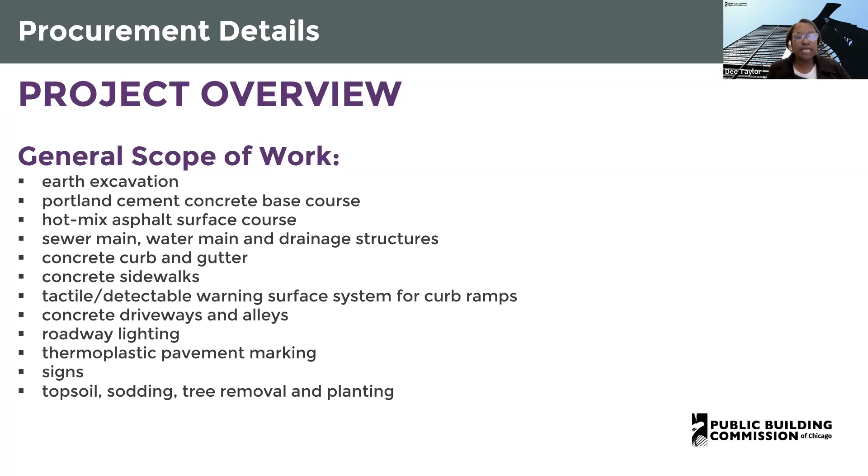The general scope of work includes earth excavation, Portland cement concrete base course, hot mix asphalt surface course, sewer main, water main, and drainage structures, concrete curb and gutter, concrete sidewalks, tactile detectable warning surface system for curb ramps, concrete driveways and alleys, roadway lighting, thermoplastic pavement marking, signs, topsoil, sodding, and tree removal and planting.

Continuing the general scope of work: our contractor will be required to prepare a phasing and logistics plan for review and approval by both CDOT and PBC prior to mobilization and commencement of any work. The contractor will also be responsible for providing critical submittals, including electrical lighting, poles and luminaires, sewer and water main, and concrete mix design, as determined by PBC, within 30 days of issuance of the Notice to Proceed, or NTP.

For our project overview, we have a time of completion that includes a couple of scheduled milestones and substantial completion. Robert, would you like to jump in here? Sure, Dee, thank you.

For this contract, we have schedule milestone number 1, which includes pre-construction, including permitting, construction submittals, material and equipment procurement, schedule preparation, mobilization, and utility coordination. That may not commence sooner than June 10th, 2025, and must be completed by June 30th, 2025.

We have a substantial completion date, which is basically the street reconstruction and associated work. Work may not commence sooner than June 30th, 2025, and must be completed by November 28th, 2025. And schedule milestone number 2, which is new landscaping, may not commence sooner than October 1st, 2025, and needs to be completed by November 28th, 2025.

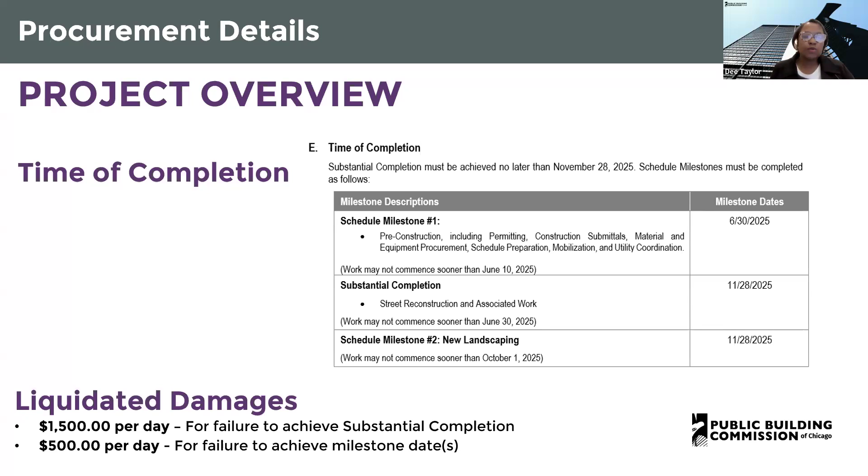Okay, thank you, Robert. There will also be liquidated damages for failure to achieve substantial completion or any of the milestone dates. It will be $1,500 per day for failure to achieve substantial completion, and $500 per day for failure to achieve milestone dates. For availability of documents, the documents for the project include Book 1, Book 2, Book 3, and construction drawings.

For Book 1, that includes our instructions to bidders, the introduction, the general project overview, submission requirements, and a few highlights including the bid form, the MBE, WBE, and EEO goals for the project, and the community area map. Book 2 includes the standard terms and conditions, T's and C's, for the contract, and Book 3 includes the technical specifications.

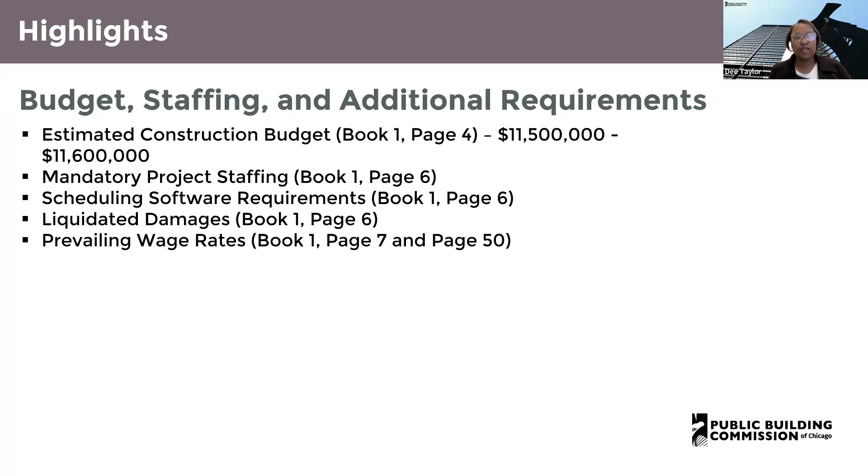We also have our joint venture opportunities, which we encourage. We encourage all vendors to look for joint venture opportunities. You will be required to complete a Schedule B, which is the joint venture affidavit. That can also be found in Book 1 on page 35. You'll have to submit a JV agreement as well as a certification letter for the MBE or WBE.

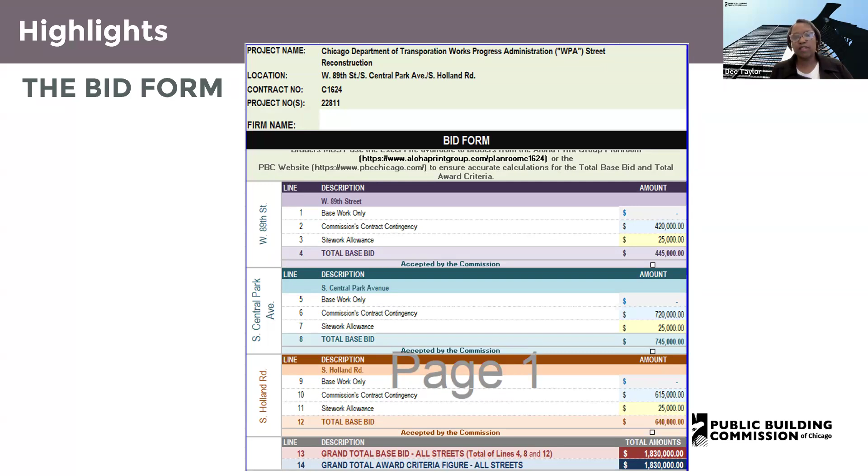For the bid form, each avenue, street, road has a separate tab. As you can see, we have a separate tab for 89th Street, South Central Park Avenue, and South Holland Road. Enter your unit pricing for each of the 3 streets, and the master bid form will automatically populate and total.

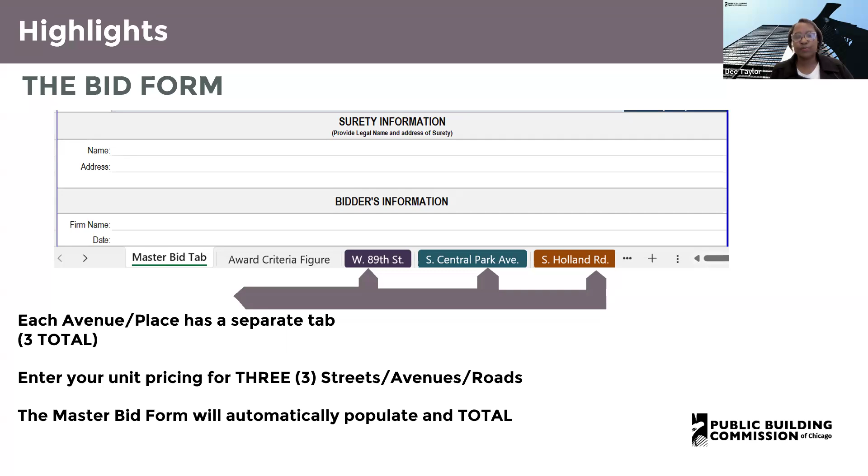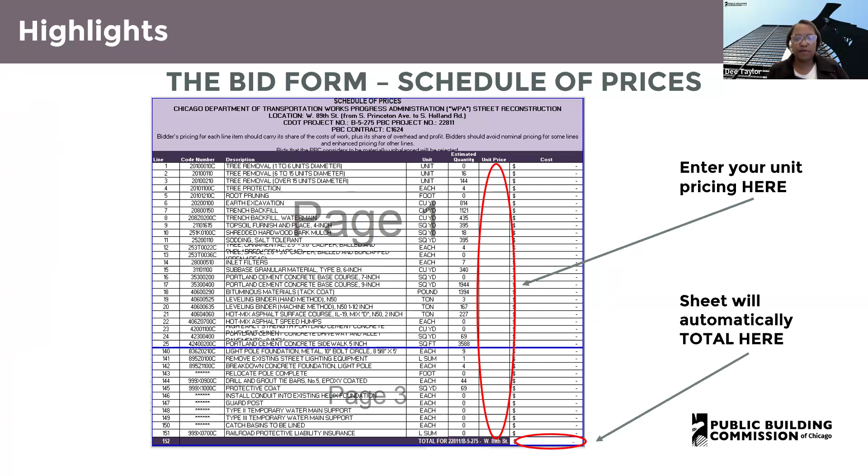Here's an example of the bid form, the schedule of prices. You will enter your unit pricing here where the arrow is pointed with the large oval circle. You enter your unit pricing for each of the line items there, and the sheet will automatically total at the bottom. Again, these amounts go back to the master bid form, automatically totaling.

We also ask for additional information on the bid form, including your surety information. We need the name and address of your surety firm. And we also need information on your firm, including your name and the date.

Okay, the basis of award. The award will be made to the responsible bidder submitting the lowest grand total award criteria figure, which is line 14 of the bid form, whose corresponding grand total base bid is on line 13 of the bid form, is within the available funds for each street or avenue, and is otherwise responsive to all requirements of the contract documents. The firms are required to fill out the entire bid form in order to be considered responsive. The Commission reserves the right to reject any and all bids wherever such rejection is in the best interest of the Commission. Bids that the PBC considers to be materially unbalanced will be rejected.

For this project, the MBE WBE goals are 26% MBE, 6% WBE. The PBC only accepts certifications from the City of Chicago or Cook County. The MBE or WBE firm must be certified in the scope of work that they are performing. Additional information regarding MBE, WBE special conditions can be found under Book 2, Article 23.

As Dee mentioned earlier, the maximum award criteria figure for this project is 70% for minority journey worker, apprentice, and laborer, and the maximum is 15% for female journey worker, apprentice, and laborer. Community hiring is a requirement. 7.5% of all construction hours should be performed by residents of the project community. 50% of all hours generated are to be generated by employees residing in the City of Chicago.

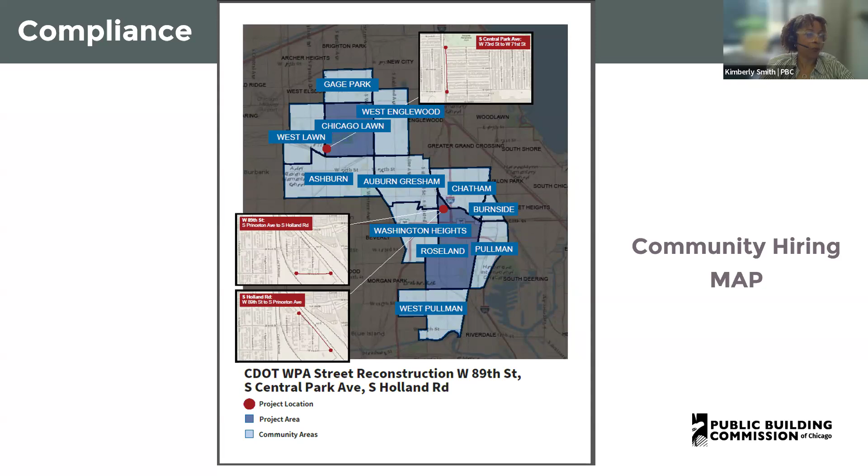The PBC uses B2G Now as our payment tracking system for MBE and WBE payments. An established business is a certified MBE or WBE firm that is participating in the city's phased graduation program. The business can only receive the credit percentage of the established business for the first year. A participating established business can earn 75% MBE or WBE credit for its performance. In the second year, 50%, and in the third year, 25%. Manufacturers receive 100% credit, suppliers 60% credit, and brokers receive no credit.

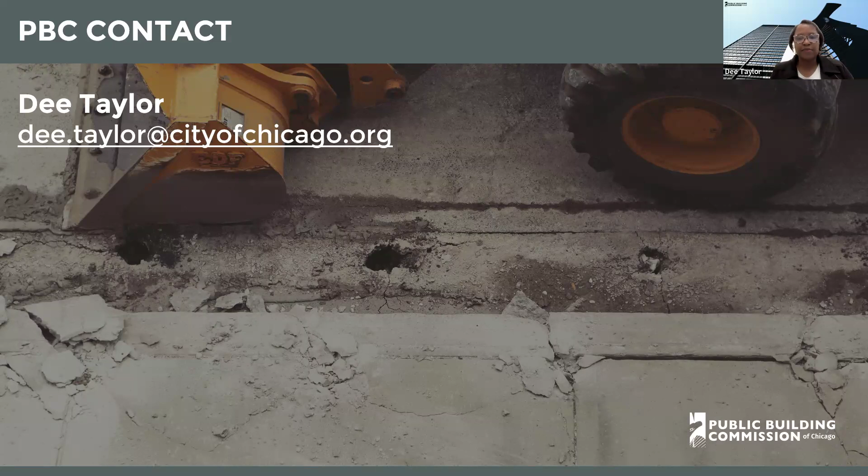Dee, before we move on to technical review, we did have somebody join via phone. If you could please identify yourself, name and company name, and unmute yourself, please. Okay, all right, we can keep going, but please make sure you put your name and company's name in the chat. Thank you.

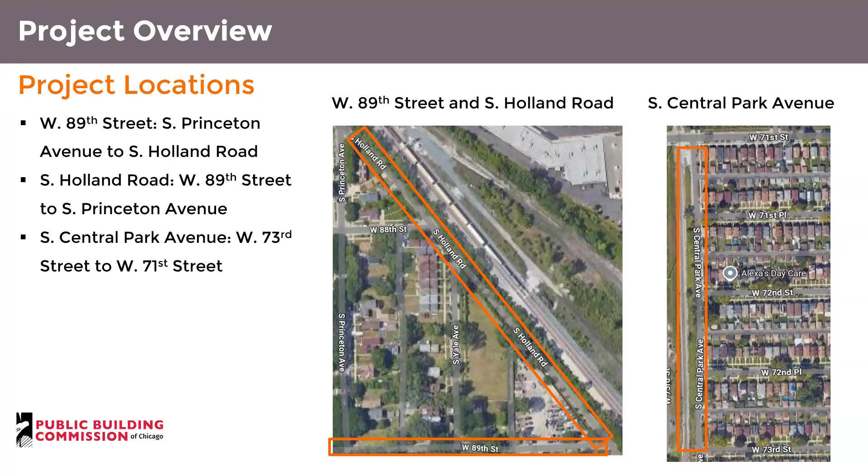We'll go into more detail with the engineers of record. Abigail will give a presentation on the specific locations and the details associated with those. One point I'd like to point out is that these projects, 2 of them, will include coordination with the Department of Water Management's lead line service replacement, which will take place on South Holland for the project for South Holland Road and South Central Park. We'll get into more details of those in the presentation. So I'm going to hand it over to Abigail, who will take over the technical description of these project sites.

Thank you, Robert. Hi, my name is Abby Luzak, and I'm the engineer of record for these projects that we're reviewing today. So we'll start with 89th Street. We will go over the existing conditions, the proposed conditions, and the local coordination.

Next slide, please. So in the existing conditions, the roadway width varies between 15 and 20 feet with a consistent right-of-way of 33 feet. There are 3 intersections on 89th Street: South Princeton Avenue, South Yale Avenue, and South Holland Road.

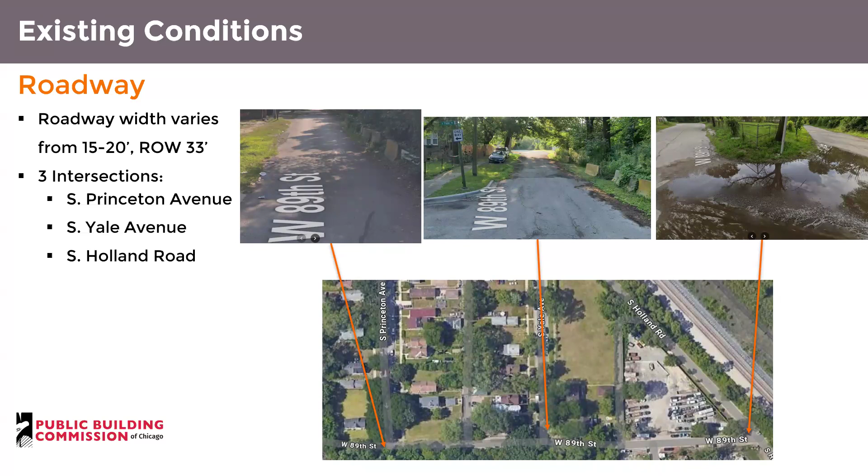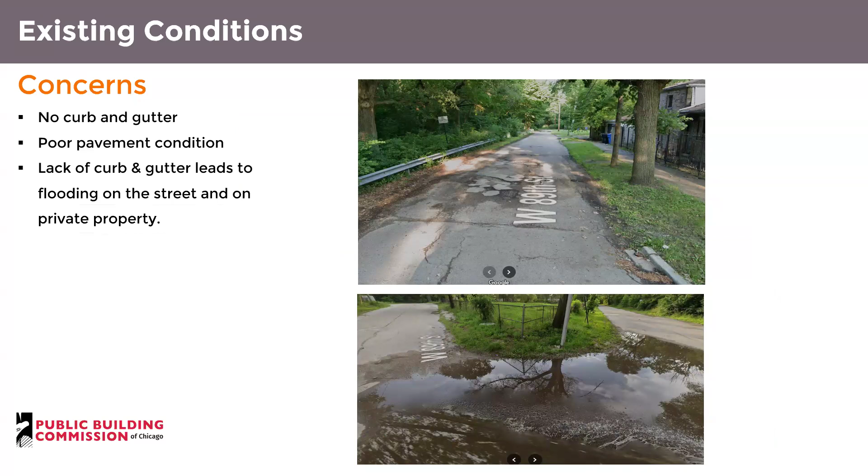The concerns for this project are similar to other WPA projects. There's no curb and gutter on 89th Street. There's poor pavement condition, and the lack of curb and gutter leads to flooding on the street and on private property, as you can see from the pictures.

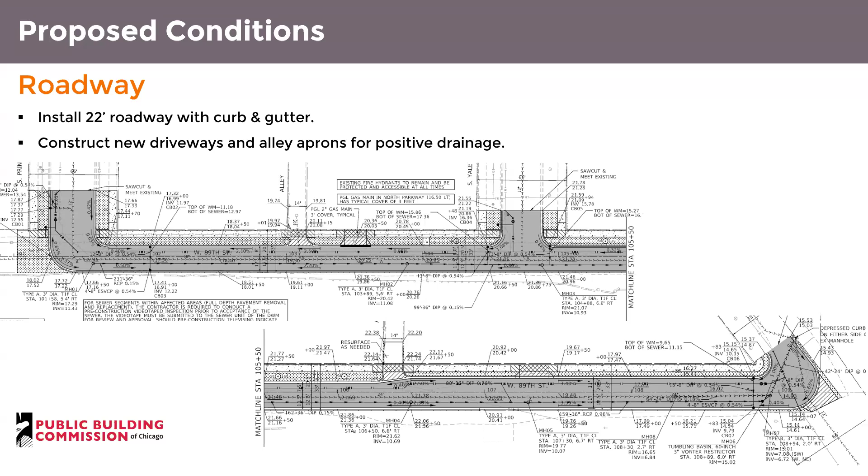In the proposed condition, the roadway width will be 22 feet, and we will be installing curb and gutter. There will also be new driveways constructed and alley aprons added for positive drainage. A new sidewalk will be installed on the north side of 89th Street between South Princeton Avenue and South Holland Road, as well as new ADA ramps installed at the intersections of South Princeton Avenue and South Yale Avenue.

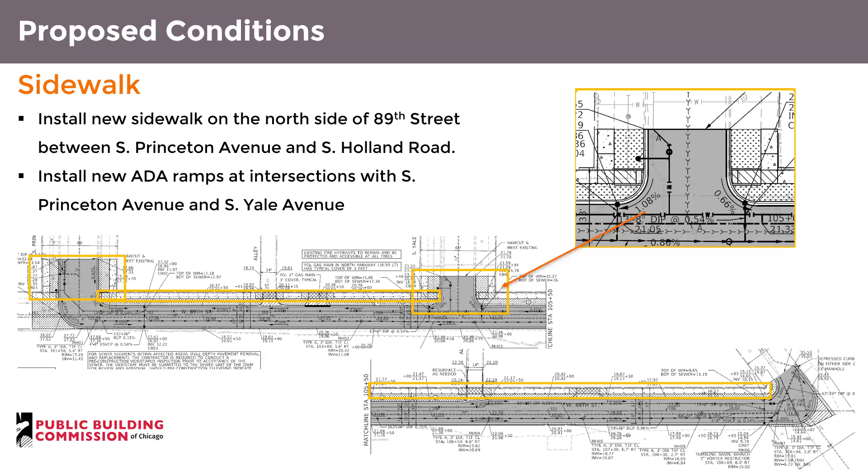For the proposed sewer design, a segment of 24-inch ductile iron pipe mainline sewer will be installed, as well as a new 36-inch RCP and DIP storm sewer per the plans. There will be connections made to the existing sewer at South Holland Road, and this project includes 7 new catch basins and 8 manholes.

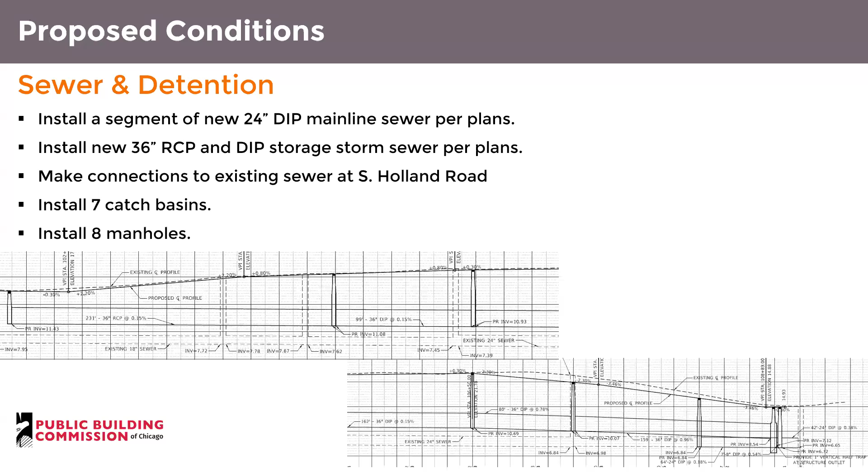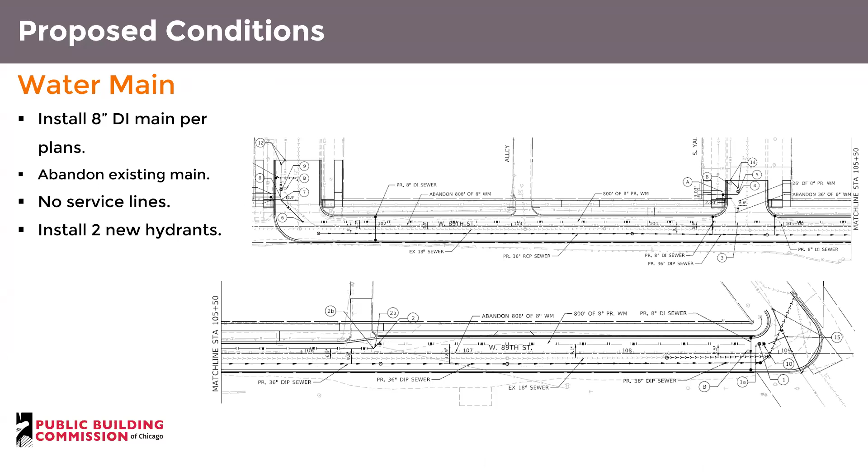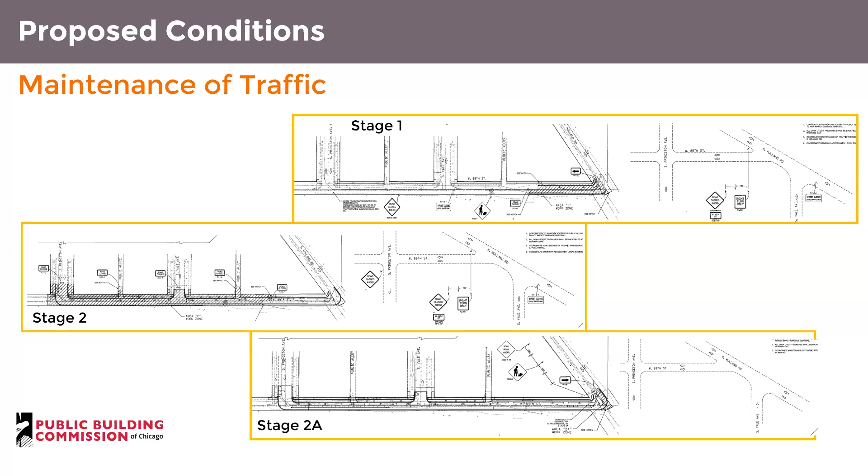The maintenance of traffic has stages 1, 2, and 2A, as shown here. And on the next slide, we also have a detour plan that will be included for 89th Street. As you can see, traffic will be directed towards Princeton Avenue during construction, and Princeton will be converted from a 1-way to a 2-way street during construction. Just to note that this detour plan also applies to the Holland project, which I'll discuss next because it is adjacent to the 89th Street project.

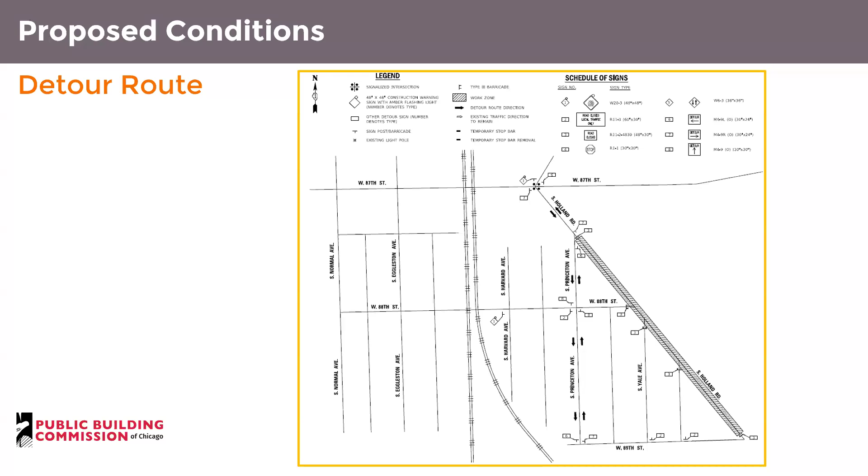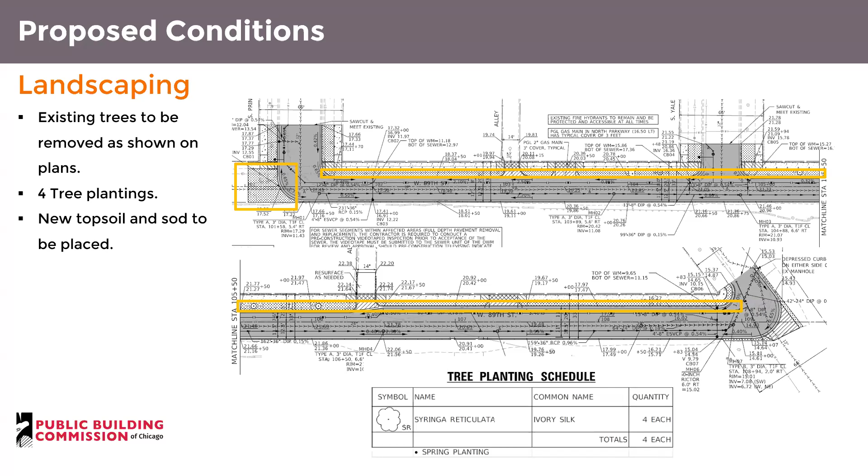The next project in the package is Holland Road, from West 89th Street to South Princeton Avenue. As I mentioned previously, this is adjacent to the 89th Street project.

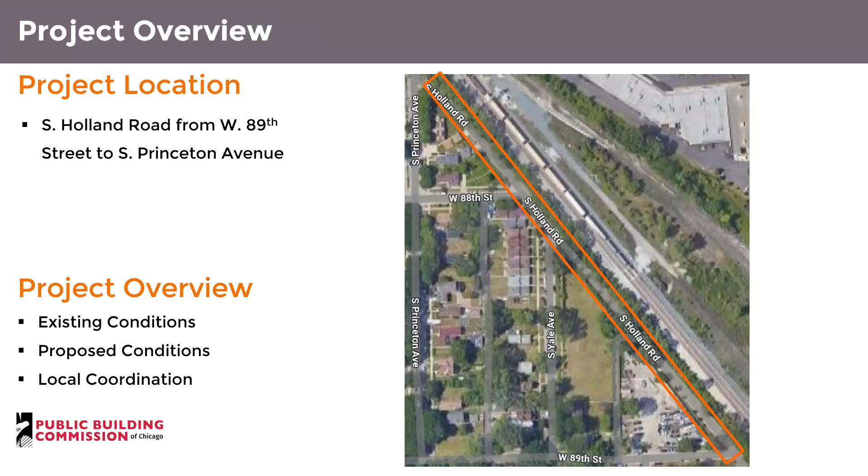For existing conditions, this roadway varies from 12 to 18 feet with a consistent 33-foot right-of-way. There are 4 intersections at West 89th Street, South Yale Avenue, West 88th Street, and South Princeton Avenue.

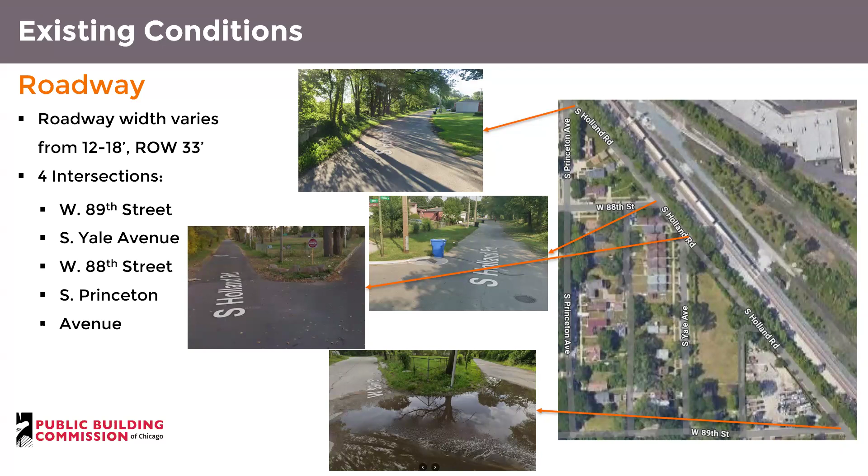The concerns are similar: poor pavement condition, and as you can see, the lack of curb and gutter leads to flooding on the street and on private property.

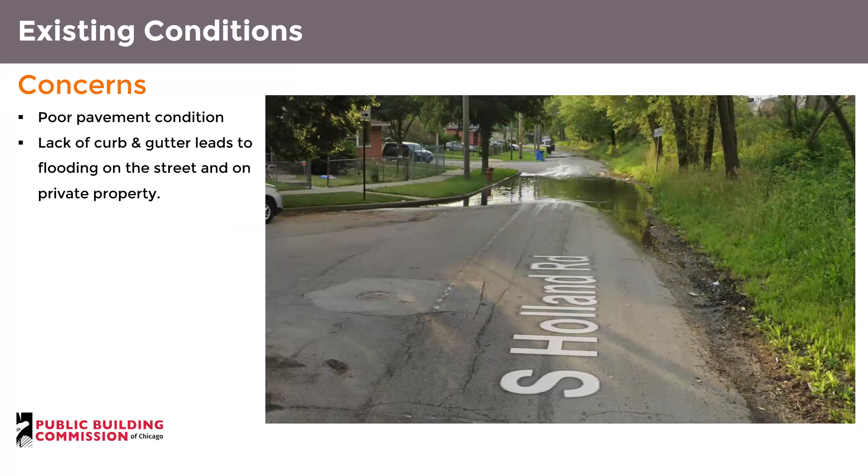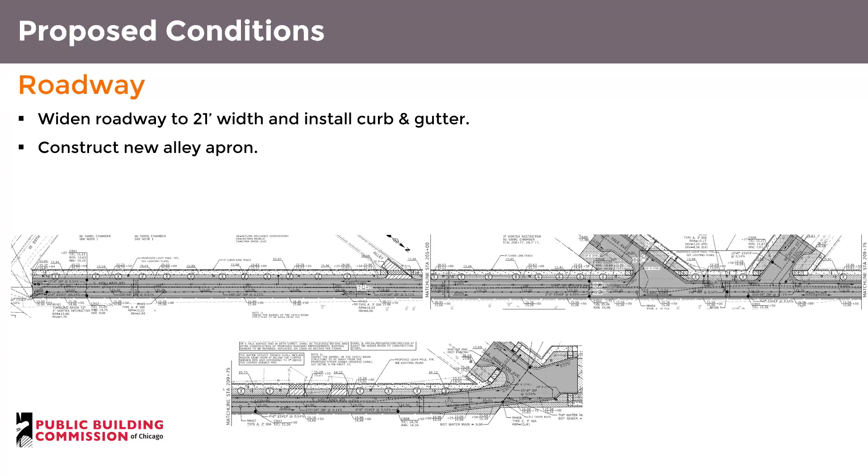In the proposed condition, the roadway will be widened to 21 feet, with curb and gutter installed, as well as new alley aprons constructed. New sidewalks will be installed on the southwest side of South Holland Road, and ADA ramps will be installed at the intersections.

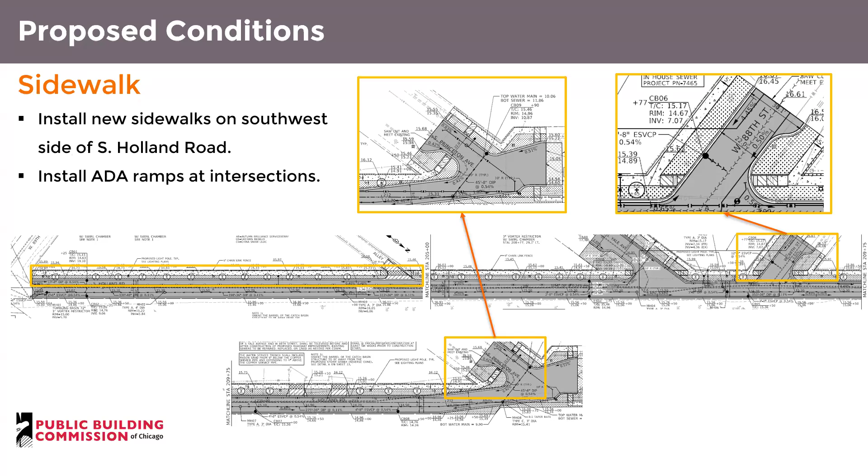For the sewer design, this project maintains the existing 15 and 18-inch sewers and has a proposed 36-inch ductile iron pipe and 48-inch ductile iron pipe storage storm sewer to be included per the plans. There are 8 manholes and 9 catch basins to be installed.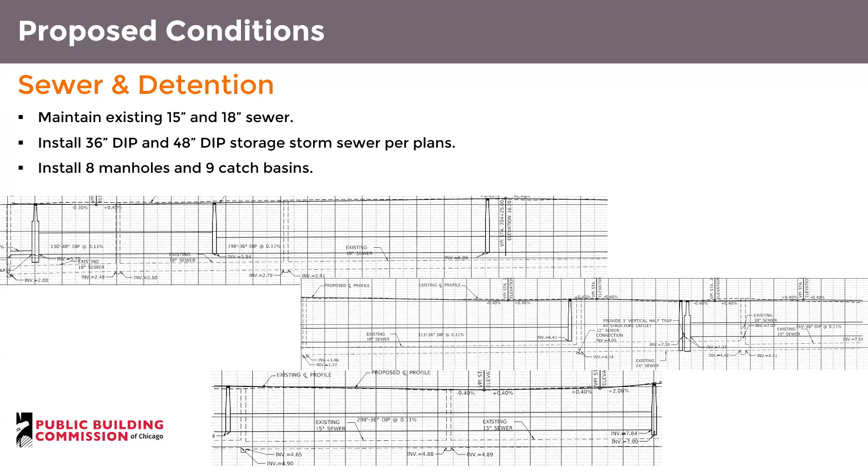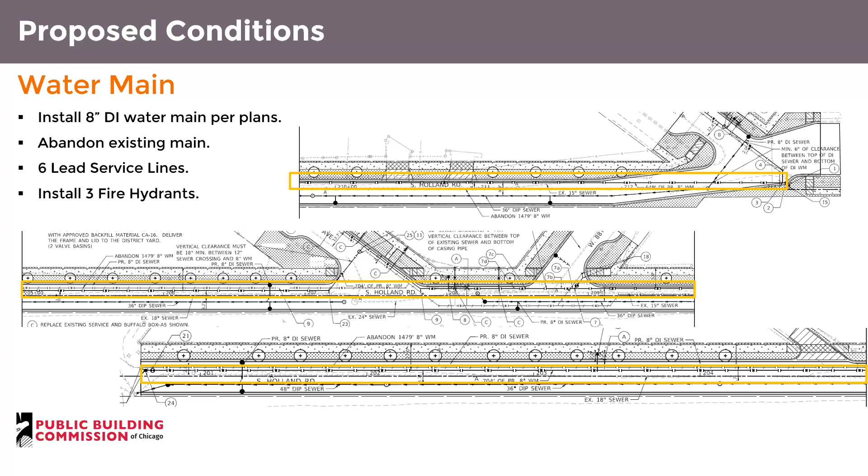For the water main, this project includes 8-inch ductile iron water main per the plans, as well as abandoning the existing water main. There are 6 lead service lines on this project and installation of 3 fire hydrants.

For maintenance of traffic, there are 3 stages: stages 1, 2, and 3. As mentioned, the detour plan from 89th Street will also be included on Holland Road.

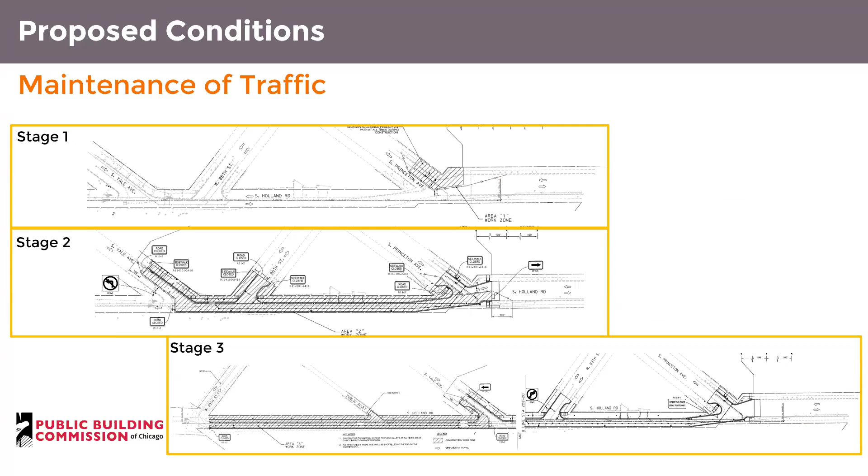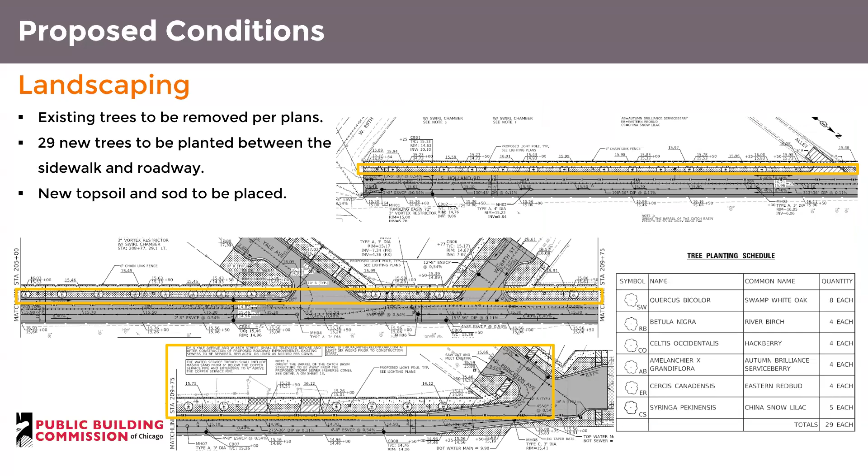For landscaping, the existing trees will be removed as shown on the plans, with 29 new trees to be planted between the sidewalk and roadway, as well as new topsoil and sod to be placed.

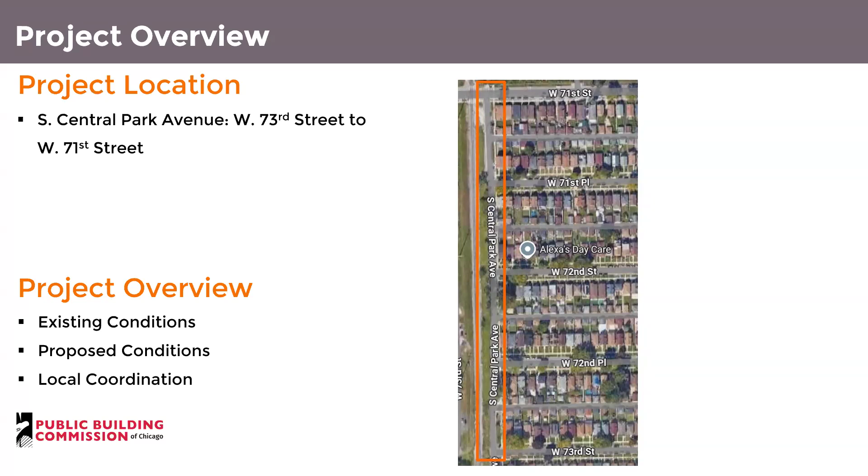Our final project in this package is South Central Park Avenue from West 73rd Street to West 71st Street. I'll show the existing conditions, proposed conditions, and local coordination.

The roadway width varies in the existing condition, but it's around 15 feet wide, and the right-of-way is 50 feet wide. This project has 5 intersections at West 73rd Street, West 72nd Place, West 72nd Street, West 71st Place, and West 71st Street.

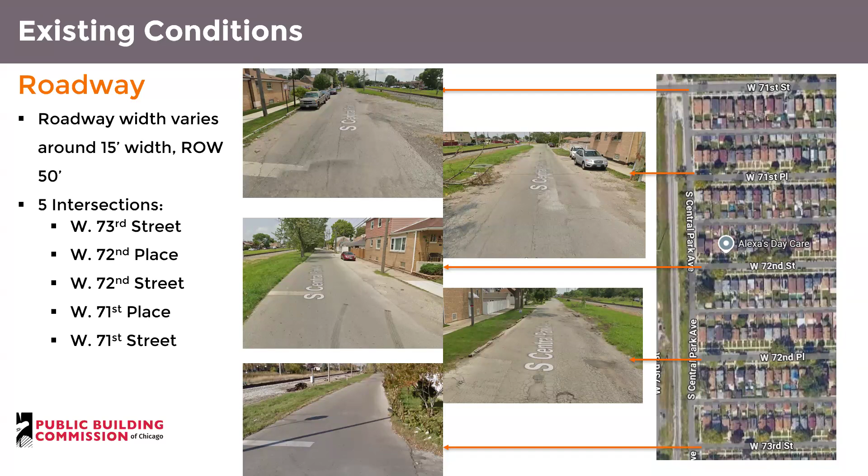The concerns are, again, the poor pavement condition and the lack of curb and gutter, which leads to flooding on the street and on private property.

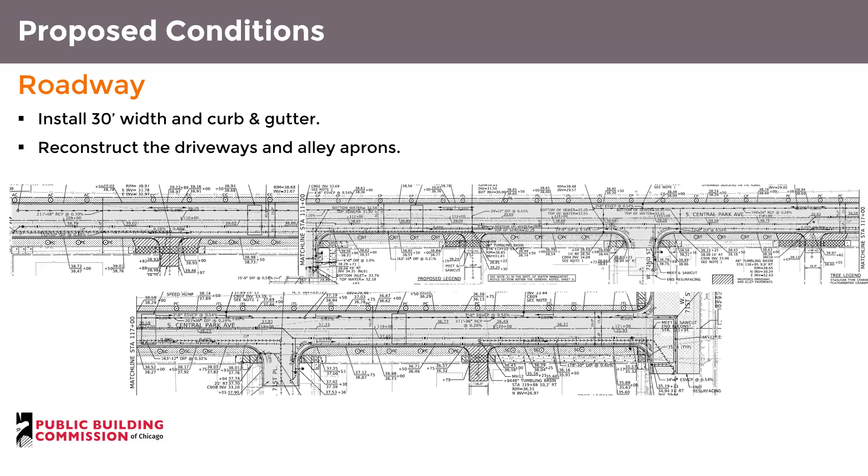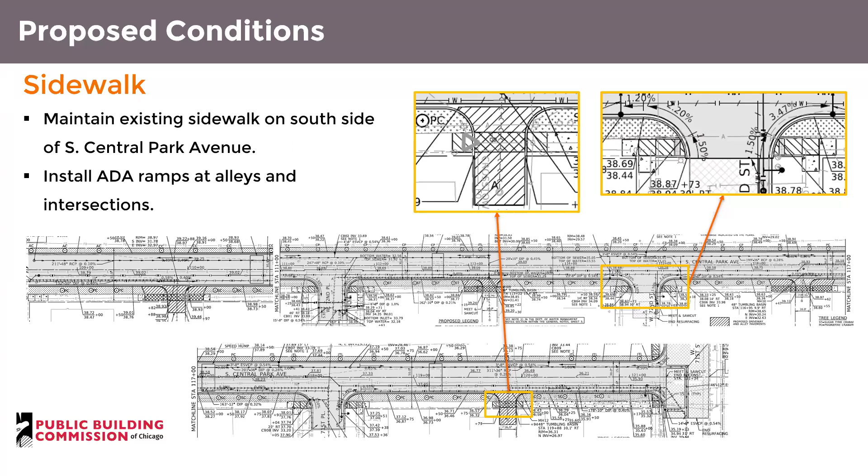In the proposed condition, the roadway will be 30 feet wide and include curb and gutter, and there will also be reconstruction of driveways and alley aprons. The existing sidewalk will be maintained on the south side of South Central Park Avenue, and ADA ramps will be installed at the alleys and intersections.